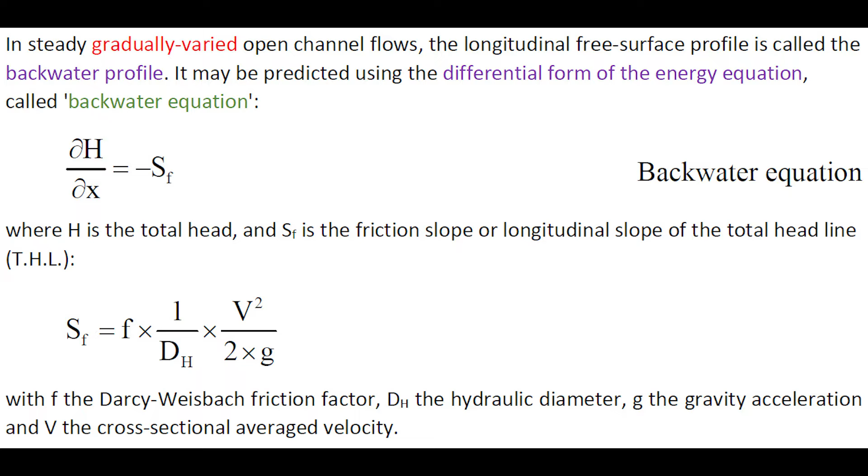In steady, gradually varied open channel flow, the longitudinal free surface profile is called the backwater profile. It may be predicted using the differential form of the energy equation called the backwater equation, shown here, in which Sf is the friction slope or slope of the total head line.

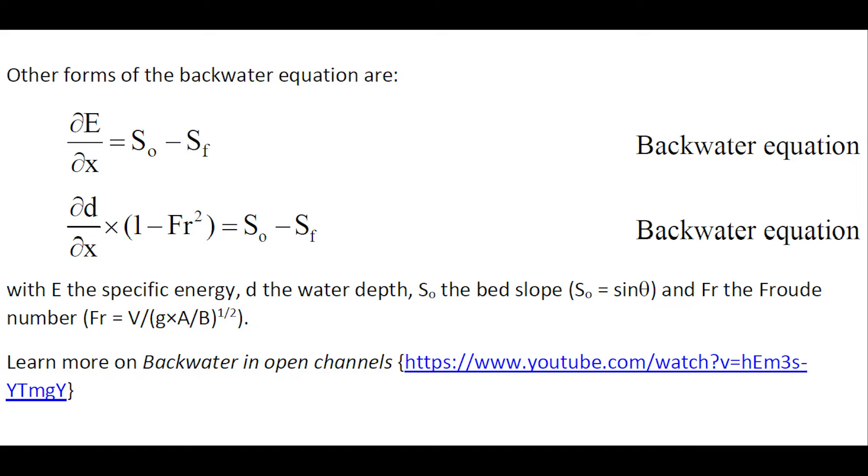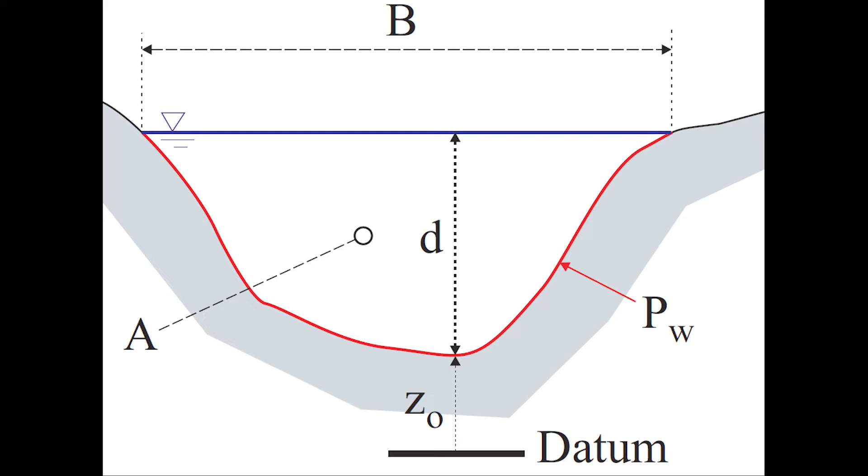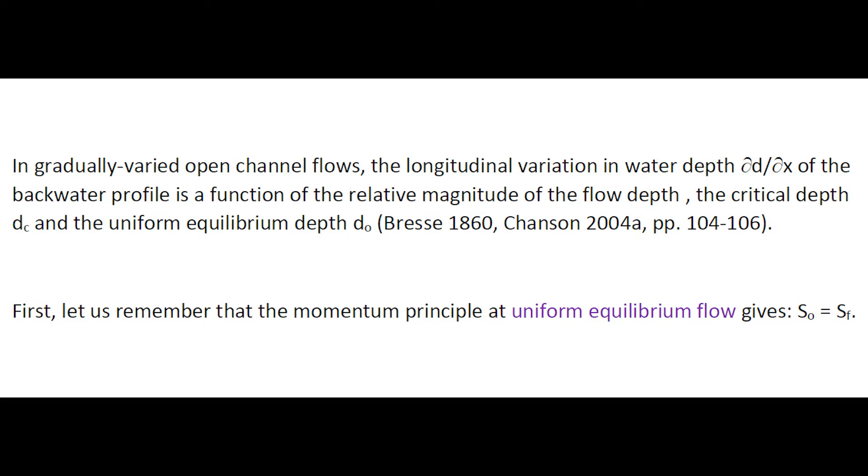In gradually varied open channel flow, the longitudinal variation in water depth, that is the variation of water depth with respect to longitudinal distance x, is a function of the relative magnitude of the flow depth, the critical depth, and the uniform equilibrium depth. First, let us remember that the momentum principle applied to a steady uniform equilibrium flow gives us S0 equal Sf, where S0 is the bed slope and Sf is the friction slope.

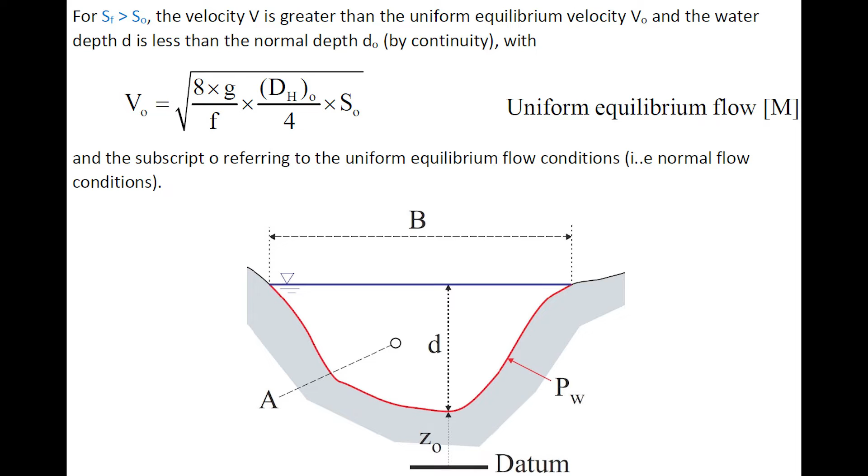When the bed slope is less than the friction slope, the velocity is greater than the uniform equilibrium velocity, and the water depth is less than the normal depth, with the expression of the uniform equilibrium velocity V0 shown here. Conversely, when the friction slope is less than the bed slope, the water depth is greater than the normal depth.

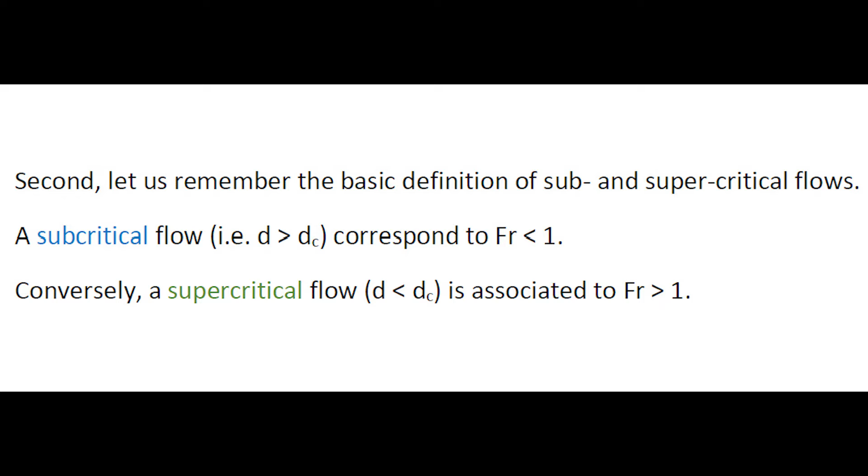Second, let us remember the basic definition of sub and supercritical flow. A subcritical flow, that is, the water depth being greater than the critical depth, corresponds to a Froude number less than 1. Conversely, a supercritical flow, that is, a water depth less than the critical depth, is associated with a Froude number greater than unity.

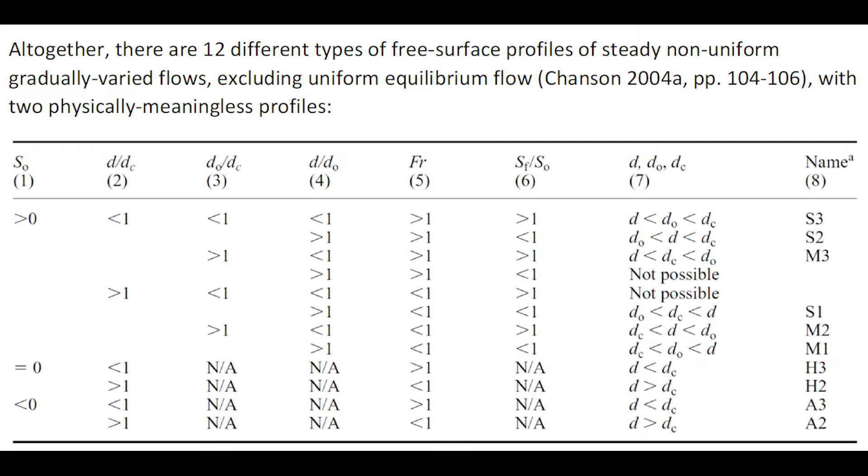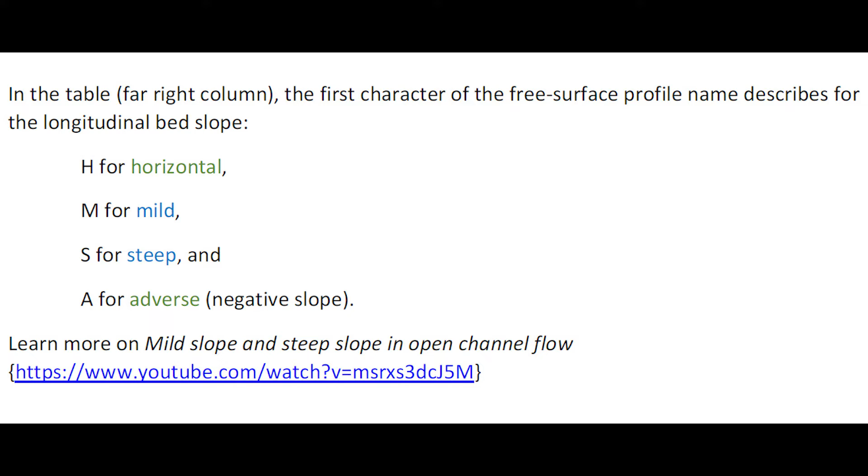Altogether, there are 12 different types of free surface profile in steady, non-uniform gradually varied flow, excluding uniform equilibrium flow, with 2 physically meaningless profiles among these. In this table, the far right column indicates the name of the profile with the first character describing the longitudinal bed slope: H for horizontal, M for mild, S for steep, A for adverse. One may look at a video on mild and steep slope.

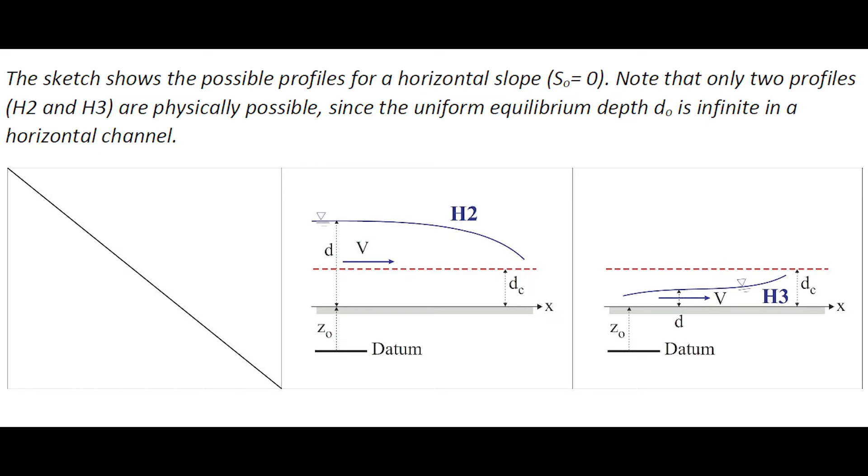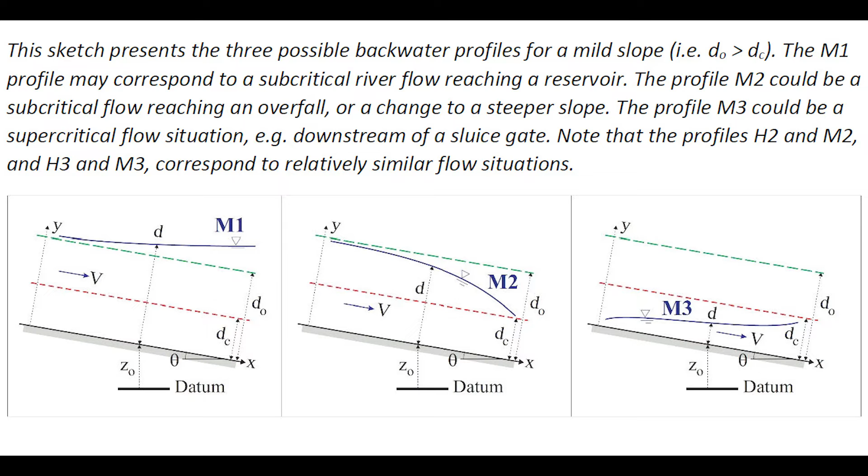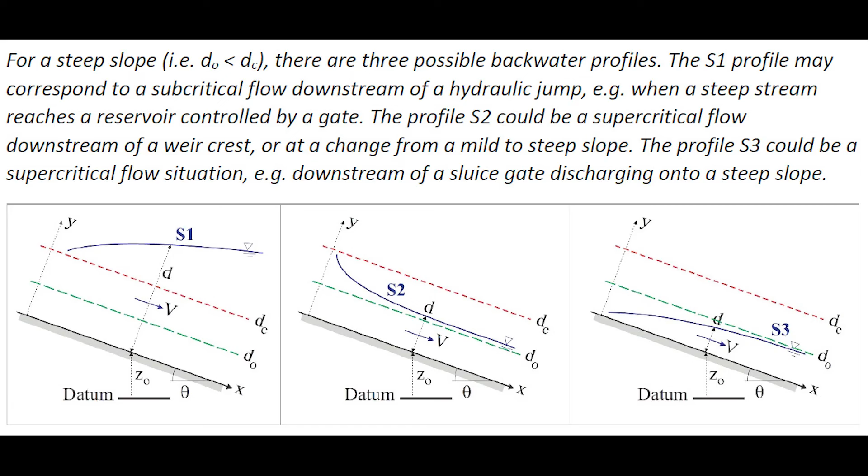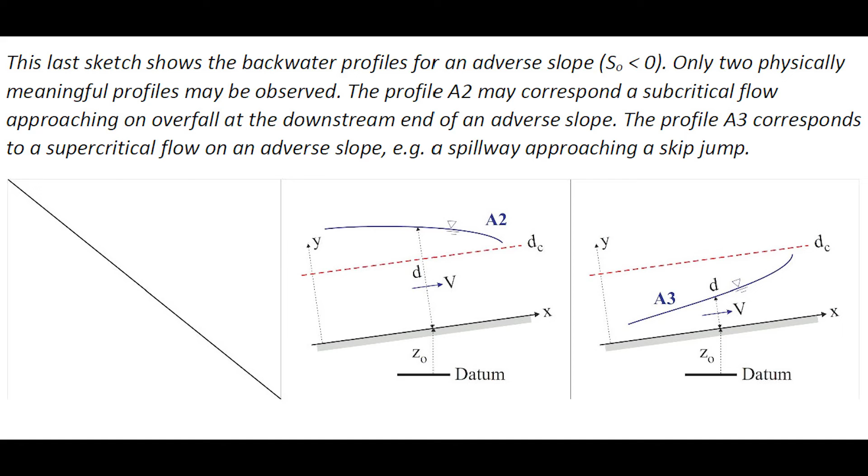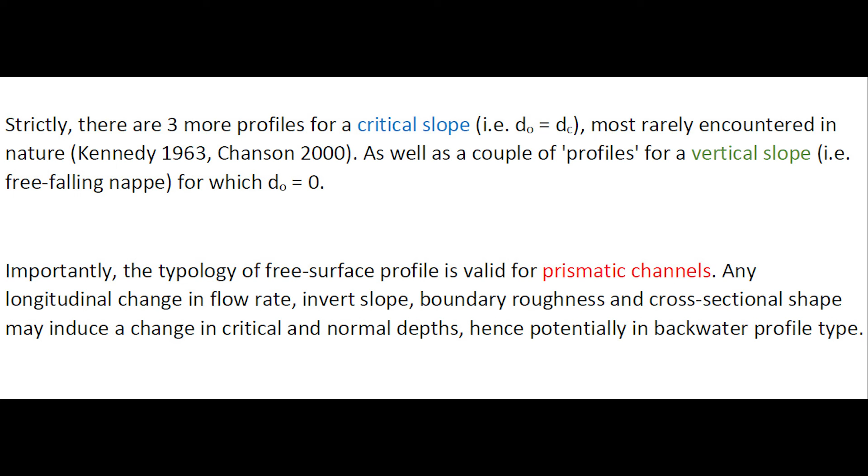Strictly speaking, there are 3 more backwater profiles for critical slope, d0 equal dc, most rarely encountered in nature, as well as a couple of profiles for a vertical slope. Importantly, the typology of free surface profiles is valid for prismatic channels only. Any change in flow rate, invert slope, boundary roughness, or cross-sectional shape may induce a change in critical and normal depth, hence in backwater profile type.

The concepts of backwater profiles and backwater calculations are essential to the hydraulic engineering of open channel flow and its practical applications, including flood modeling, that are discussed in a number of relevant YouTube video movies in the same playlist.